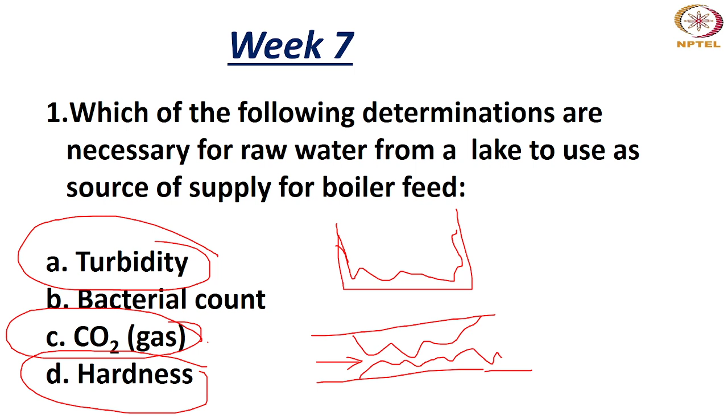So please calculate as fast as possible. If you can remember the formula, use it. If you can't, you can go through the notes and use the formula.

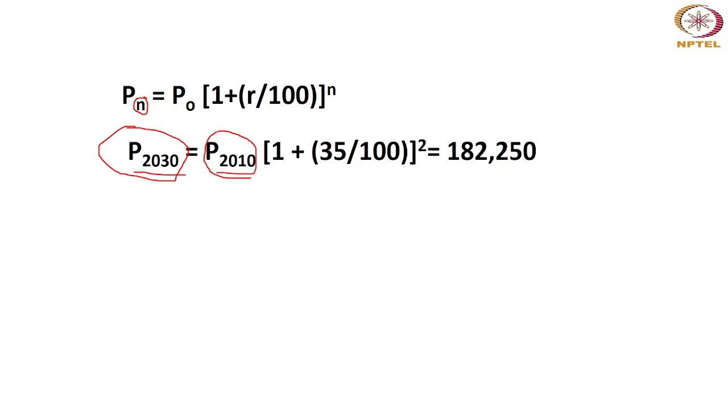So this is my predicted population at 2030, and this is the population I have around 2010. Here n is the number of decades we go through. From 2010 to 2020 and from 2020 to 2030 is two decades, so n will be 2. For r, I will write 35, that was the 35% increase. And for P naught, you write around 1 lakh. If you calculate, I am getting around 1,82,250.

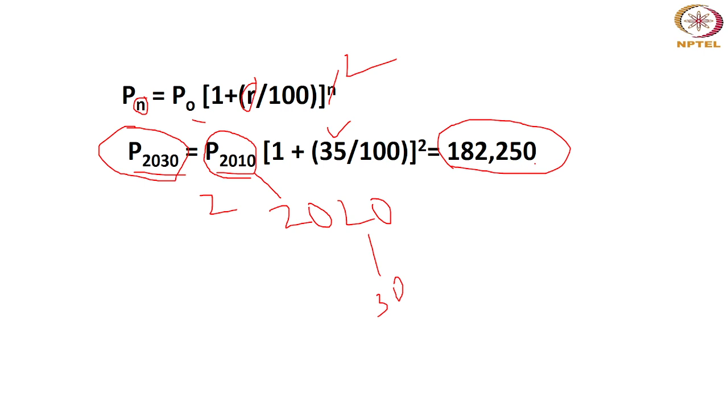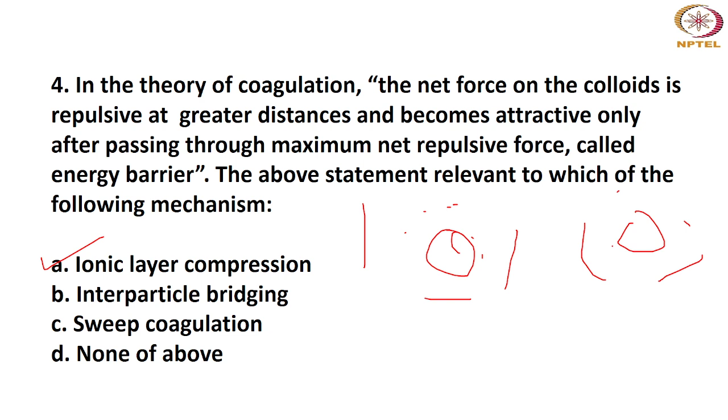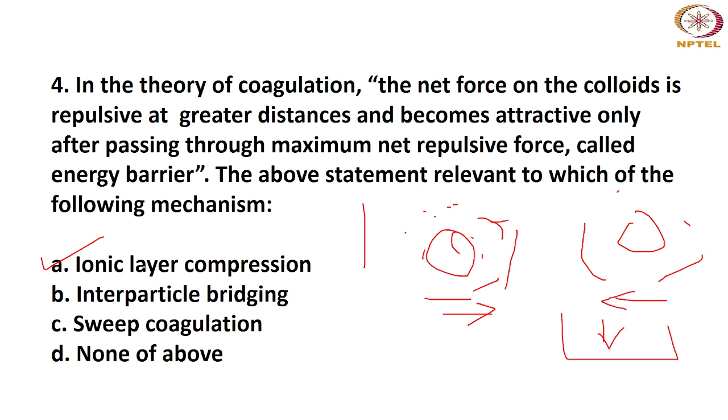So if we want to compress this ionic layer around this particle, mostly the negative ionic layer, then we have to give the force, or we may need to increase the concentration of the particles so that they will come closer, and through this ionic layer compression it will go beyond the zeta potential. It will exceed that.

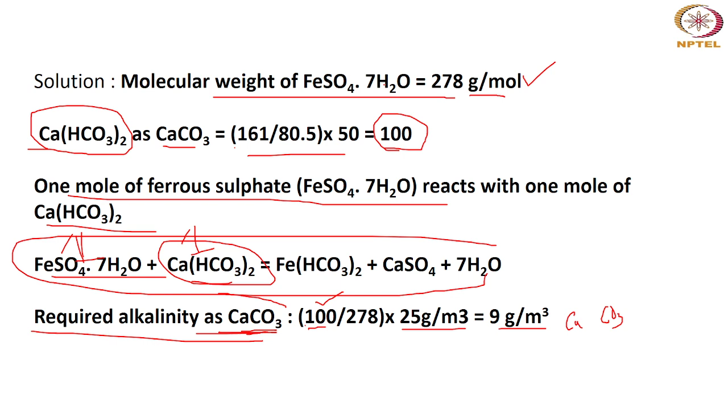So here it is. For Fe(HCO3)2 1 mole, I need 2 moles of Ca(OH)2, and for 2 moles of Ca(OH)2 I need 2 moles of CaO. So I need to multiply with 2, and the basic dose was 25 gram per meter cube. Here you can see that was 178 for this Fe(HCO3)2. And I have calculated in the previous question the molecular weight for FeSO4·7H2O, that was 278 gram per mole.

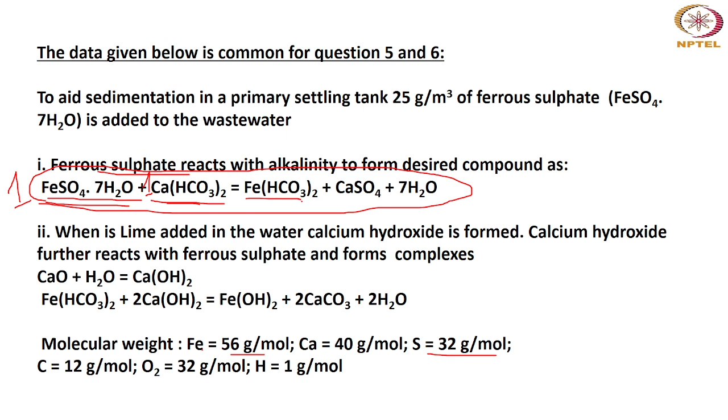From the previous equation, from 1 mole of FeSO4·7H2O, that is ferrous sulfate, I am getting 1 mole of ferrous bicarbonate. That is why I am taking this for the unitary method. For 278 I am getting 178, multiplied with 25 gram per meter cube. That is the amount of ferrous bicarbonate I am getting, and that is multiplied with 2 into 56, that is my CaO, because for each ferrous bicarbonate I need 2. So multiplied by 2 into 56 divided by 178, I am getting 10.1 gram per meter cube.

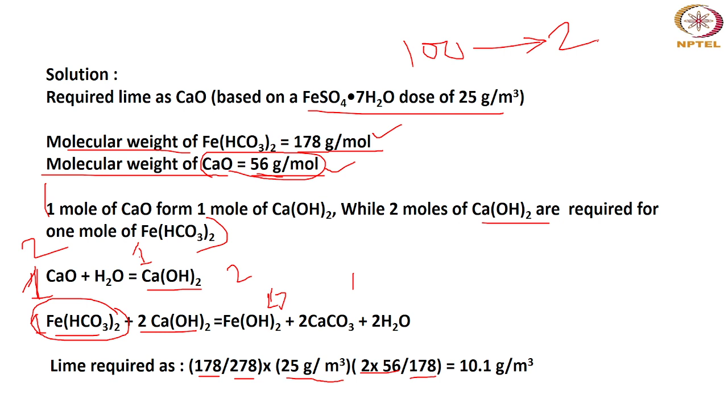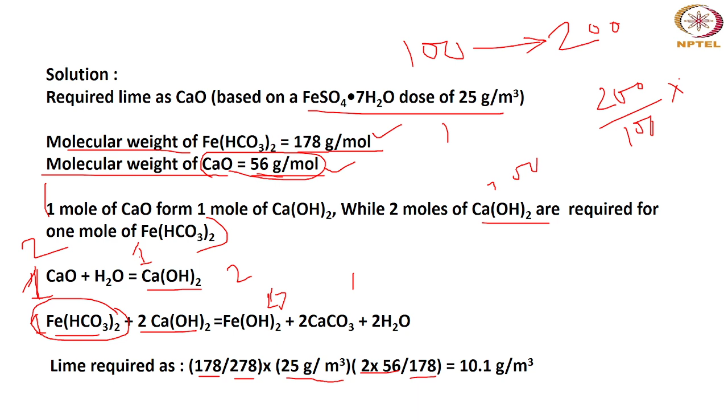So like the unitary method, you have to calculate considering the molecular weight and the chemical reaction, how many moles you need. Suppose for 100 molecular weight I need 200; then for 1 I need 200 divided by 100, and for 300 I need 200 divided by 100 multiplied by 300. That is the thing.

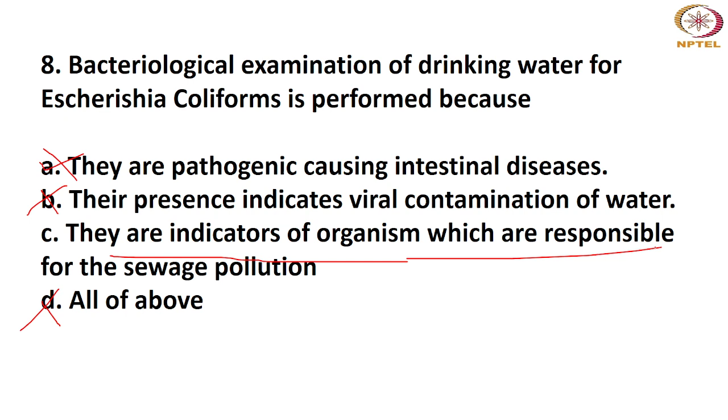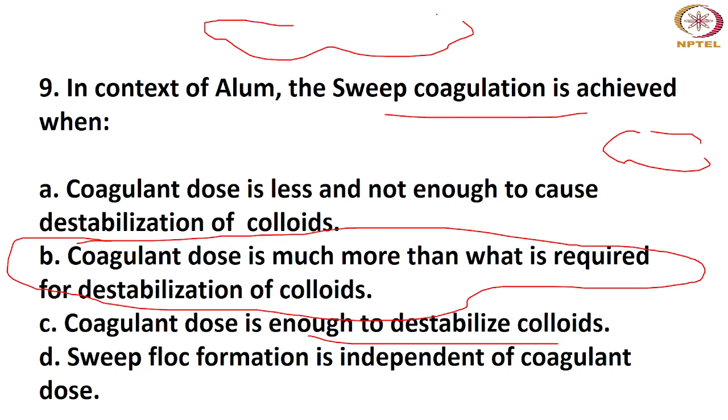Okay, so the correct answer is B. Here you can see the coagulant dose is much more than what is required for destabilization. Then it will sweep away all the colloids, right? If it is less than that, it will not form enough flocs. If it is just enough, it also will not act as sweep coagulation. But if the dose is very high, it will form bigger flocs and sweep away all the colloidal particles with it.

So the next one. This one is a numerical question again related to population growth. I assume that everyone can calculate this because you tried the previous one and that was correct. The only thing is here you need to take care of the arithmetic rate of population growth. That is the method here.

Present population was this much, then expected population after 20 years was given as 52,000. Present water consumption is 3,700 meter cube per day. Water treatment plant design capacity is around 5,600 meter cube per day. You have to assume the arithmetic rate of population growth. So calculate the number of years from now when the plant will reach its design capacity.

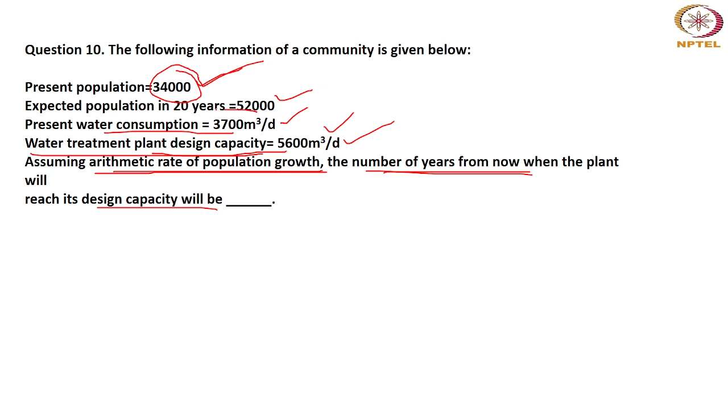Then the next step, you have to calculate what is the present average water consumption per head per day. How you will calculate? So here, this is my present population, 34,000, and the present water consumption is 3,700 meter cube per day. So if you just divide this 3,700 with 34,000, then you can calculate 0.1088 meter cube per head per day. This is the present average water consumption, right?

So this much of population was in that city, and this was the total consumption in meter cube per day. If you divide this, you will get per head what is the water consumption. Then increase in the water consumption for each year.

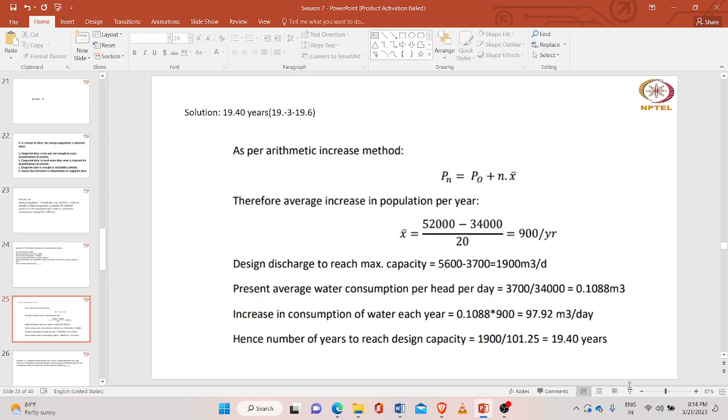Sorry, sir, your voice is echo. Okay, let me check. Unable to hear, sir. Okay, voice is in echo. So now is it okay? Can you hear me properly? Yes, sir. Okay. Ranjit, thank you.

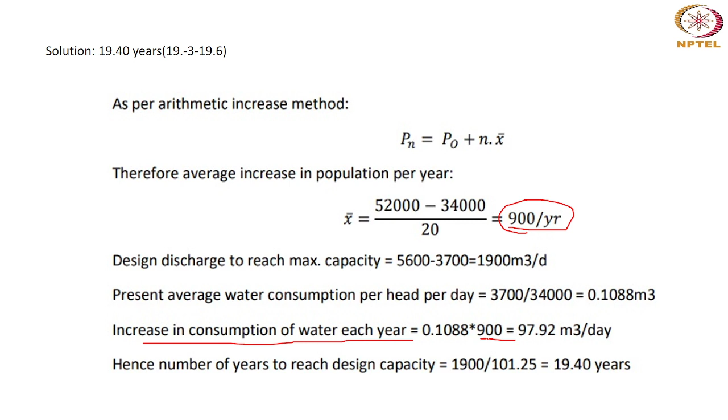So every year I am getting this much of increase, 900 per year. So what is the increase in consumption of water per each year? Simply 900 per year multiplied by 0.1088, and I am getting 97.92 meter cube per day. That is the increment of the water consumption. And another thing I am getting this.

I think there is some issue. Okay. So yes, I need to calculate this for per year, right? I need to check. There is some issue because it was in year, right? It is day. So you have to calculate this carefully. I think I have done some mistake here. Okay. I think this value is 101, if I'm not wrong. Please check this value while calculating. Yes, this value you need to change a little bit, I guess.

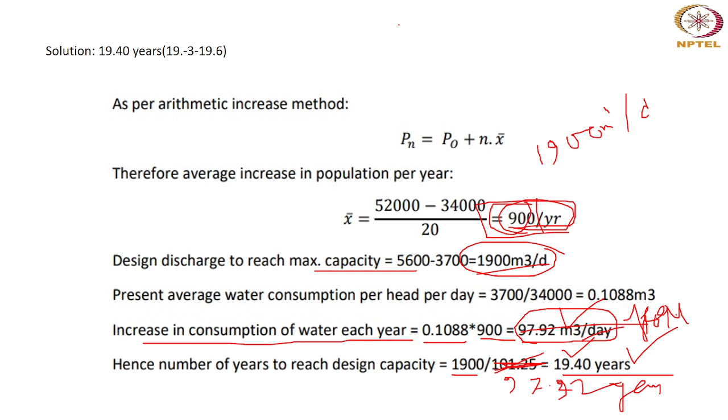See, it is not showing. Question is not showing. Sorry, fire demand, what you are telling about, but this is not showing. Sorry, I can't hear you properly. Can you write down your doubt? It is showing. Okay. Okay.

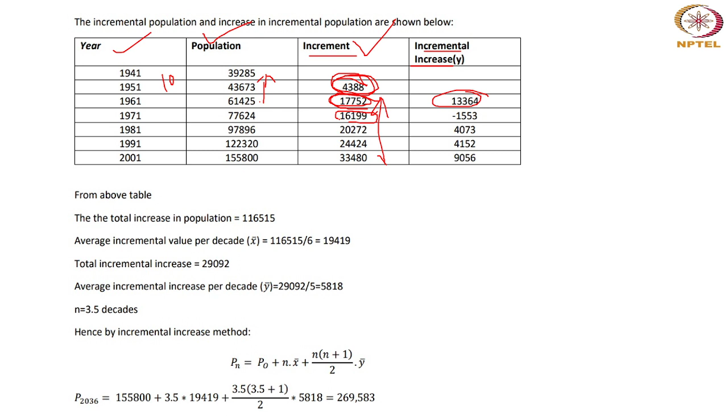If this value is less, the population is definitely still increasing, but the increment was decreased, right? For this decade there was much more increment, around 17,000. In case of this decade, 1961 to 1971, there was a little bit decrease in the increment, not in the total population. Total population is increasing, but the increment was decreased. That is why it is 16,000, and I'm getting a negative value. So fine, no issue. You can get negative values in case of incremental increase.

Similarly, we will calculate this table. From the above table, you also have to calculate the total. It was not calculated here, but you have to calculate the total increment, the summation of these, and the summation of this table also. And also you can calculate the total increase in the population. If you sum this table, you will get around 1,16,515. It is a very big number, right? So what is the average incremental value per decade?

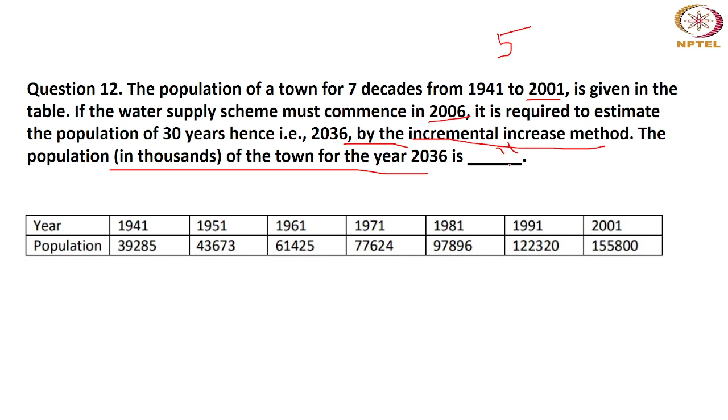I'm getting around 5,818. Now the number of decades is around 3.5, because the data is up to 2001 and there are 5 years extra. From 2006 to 2016, then 2026, then 2036. So 3 decades here and 5 years extra, because the data is up to 2001 and the treatment plant will start in 2006. I need to take care of these 5 years also. So I am getting 3.5 decades, right?

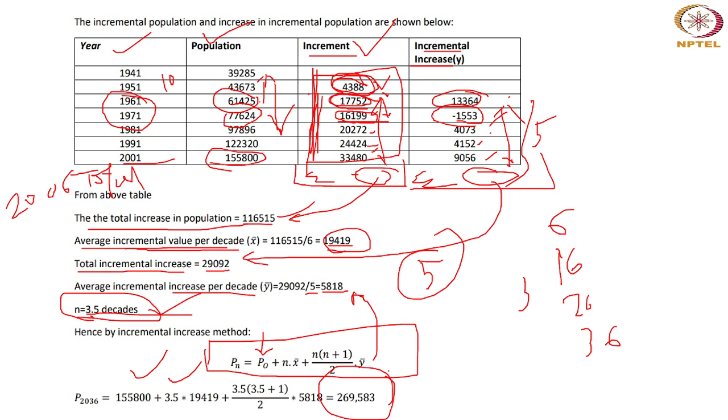So this is my formula for the incremental increase method. Now you just have to put in the values, nothing else. What is my P naught? This is my 2001 data, around 1,55,800, right? And n is 3.5. Then I have calculated X bar, which is around 19,000. Then you put the value for n, and finally the Y bar value, the average incremental increase. If you calculate, I'm getting around 2,69,583 as my final answer.

The next question is regarding the MPN test. You have to calculate the MPN per 100 ml value. The table is given, the sizes of samples are given, and the number of positive and negative tubes are given. So you have to find out the MPN value per 100 ml for this multiple fermentation test.

Maybe 1 minute, then I'll go for the solution. Is it 332? Okay. Yes. Thank you, Abdul, for your answer. We'll check. Okay, sir. Yeah. Abdul, you were saying that 332. Yes, Abdul, you are correct. The answer is 332. Okay, thank you, sir. Thank you, Abdul.

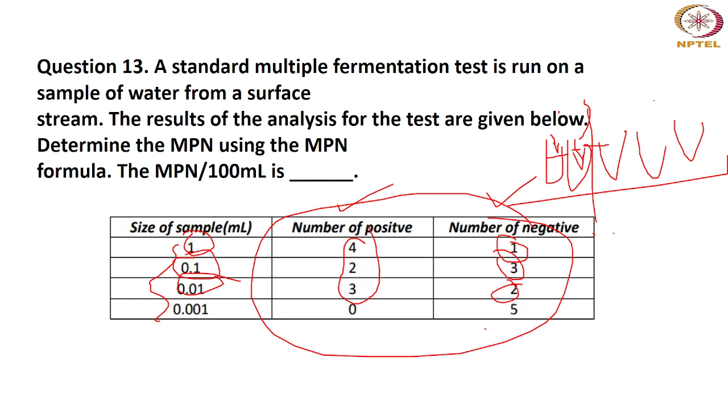I'm getting 9. And ml of sample in the negative tubes: 1 multiplied by 1, then 3 multiplied by 0.1, then 2 multiplied by 0.01, and then 5 multiplied by this one. So if you calculate this, I'm getting 1.325, and then ml of sample in all tubes. It is very simple, 5 multiplied by 1, 5 multiplied by 0.1, because totally it was 5 multiplied by all the sample sizes, and I am getting 5.555.

Just put the values here. Number of positive tubes was 9, this value and this 5.555, you will get around 332. So the next one, theoretical question regarding the treatment unit and the function. I'll answer this quickly. So answer maybe B. Ranjit, thank you. You are saying B.

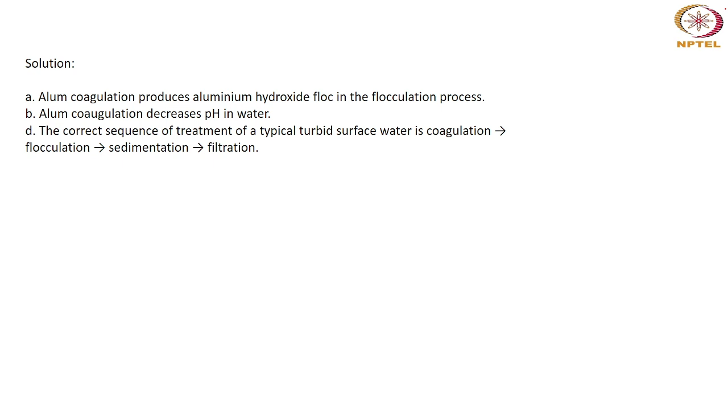Option C also. Okay, you are saying option C. Option B is also. Okay, so option B, right? So the correct answer is not C, only B, D, and A. Because the first one is very simple, the D. First we go for coagulation. If there is no coagulation, then there will be no flocculation. Floc will not form, right? So first we need to add the coagulant and do the coagulation. Then the floc will form, this floc will sediment, and then we'll go for filtration.

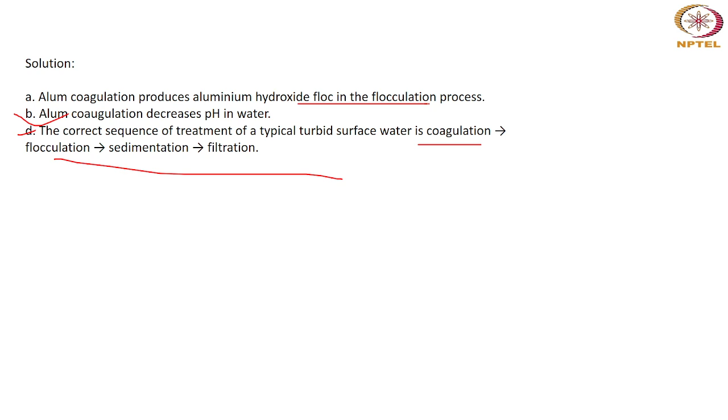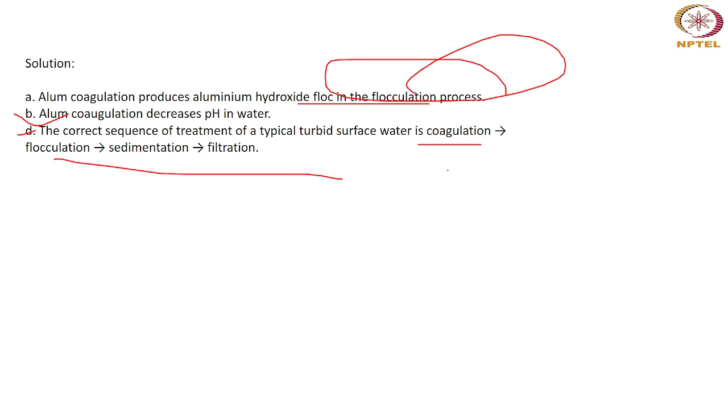This one is a very easy one. Alum will decrease the pH and it will form the hydroxide floc. It is very much essential, but not the zeta potential increase, because if the zeta potential increases, it will hinder the coagulation process. So what is the main backbone of our coagulation process? We need to reduce the zeta potential. That is the basic theory. If the zeta potential is increasing, then it is of no use to use the alum, right?